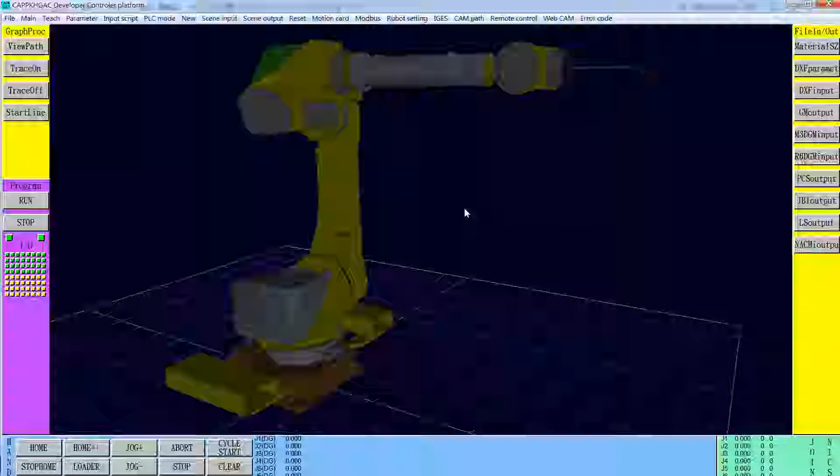Whenever we get the IGS file, we have to go into SolidWorks and open the old file to find the right folder, the FANUC 710, and translate the coming IGS file into SolidWorks inside geometry file. Open it.

The coming IGS file will translate through several processes until the 3D geometry model displayed on the screen, which is the assembly file of the Loba. Before doing anything, we have to survey.

If the Loba is located correctly. Let's see, this is x-axis, this is y-axis. So the Loba stands up, the sky at the top. So it is correct. And then we survey the original of the Loba. We put the cursor, press nothing. Then the center of the Loba, the original point of the Loba, will display at these points. This side cannot see correctly.

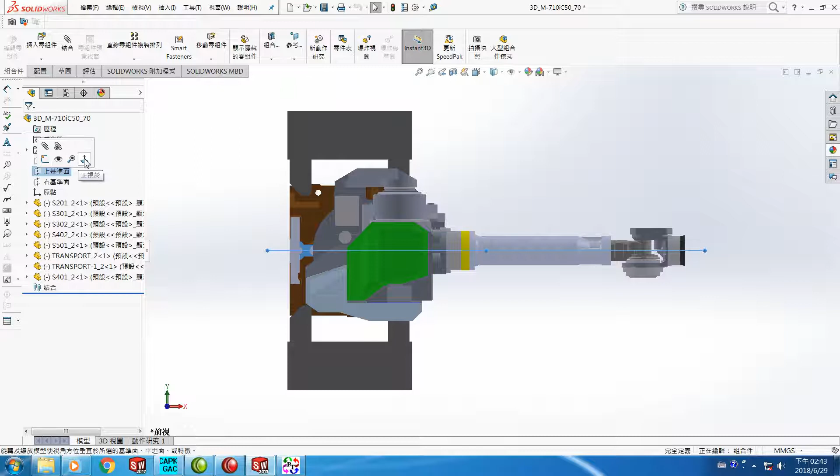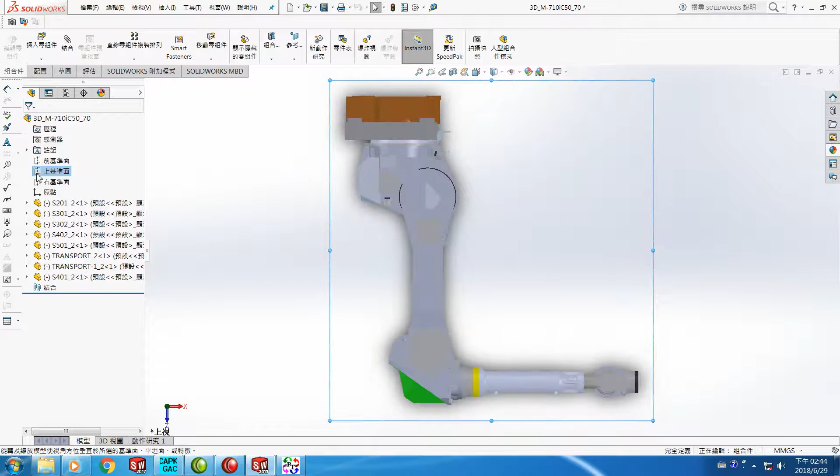Then we change to the up base position, and then see the original points at the bottom of the foundation. So this Loba is correct, standing up and in the right position.

And the home position is just like this. This is X positive. The Loba points to X positive. And the component 3, this joint and this joint, the X coordinate should be the same. That means this bar should be vertical.

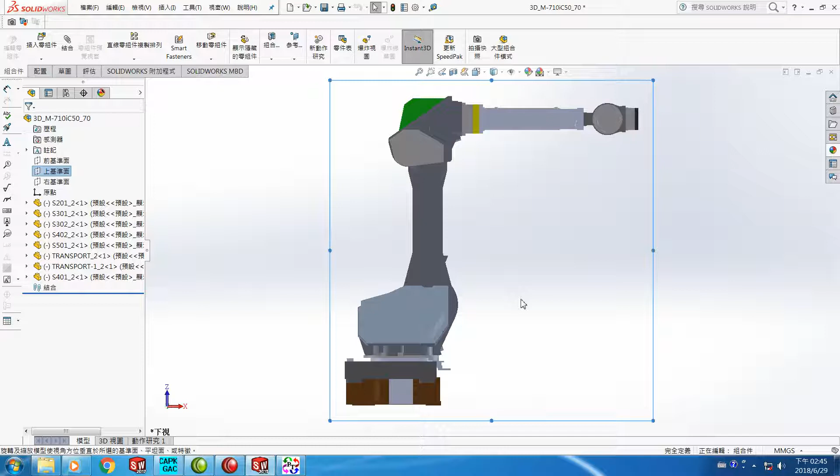This is a very foundational, very standard 6X Loba. The 6X Loba definition: the first axis always rotates around the z positive direction. The second joint rotates around the y-axis coordinate. The third joint rotates around y positive as well.

The fourth joint rotates around the x positive direction. The fifth rotates around y positive as well. The sixth rotates around the x axis. This sixth basic rotating direction is standard definition.

After the transformation from IGS into the geometry displayed on the screen, we have to save the assembly first by means of a save file. Give the style as ASM, the name the same as before the IGS file, and save it.

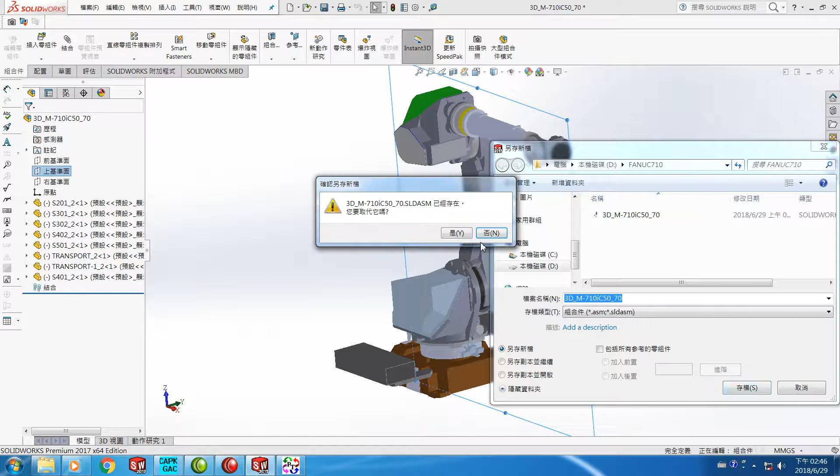After saving, we survey if the X-Y-Z coordinate is correctly located. Then we have to survey the separation for each J1 to J6 component before doing any combination.

Suppose for the base starting from the foundation, the foundation, you pick here, it will reflect here. And then we press here, it will reflect the total geometry on the screen. You can see this one and this one. This one is transport 1, this one is transport 2.

Because this is a really big Loba, these 2 steps are better for the workers to stand on. Therefore, the basement, not only this component, the transport 1 and the transport 2 have to join the foundation, because these two are fixed on the basement to form a total foundation.

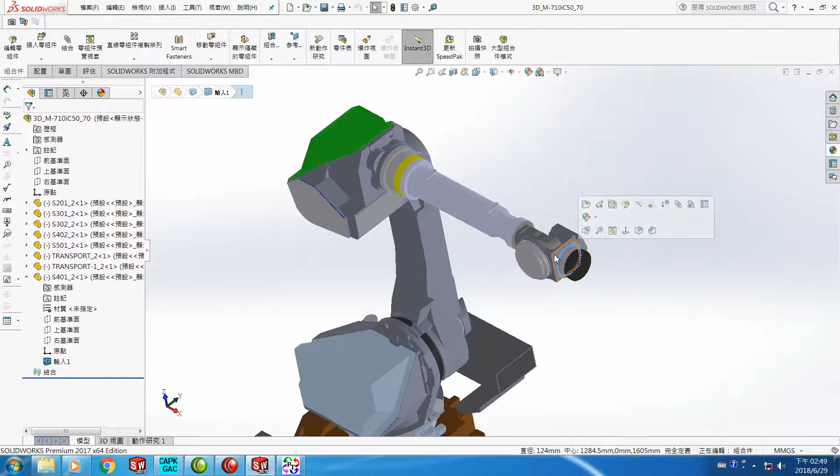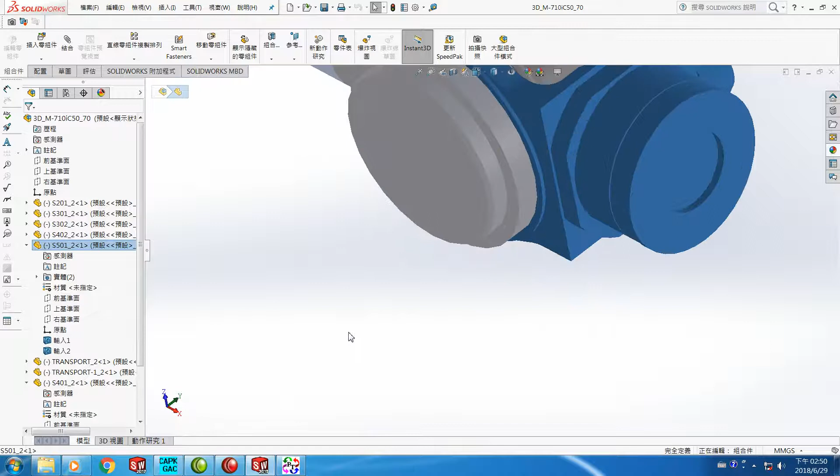And how about the J5? Okay, J5 and J6 are combined together. We separate it first, then handle J5, then J6 separately, to get 6 components plus the basement, totally 7 components. Then to add a tool, we have to get a PRT file for these 7 components, and then get an IGS file of these 7 components.

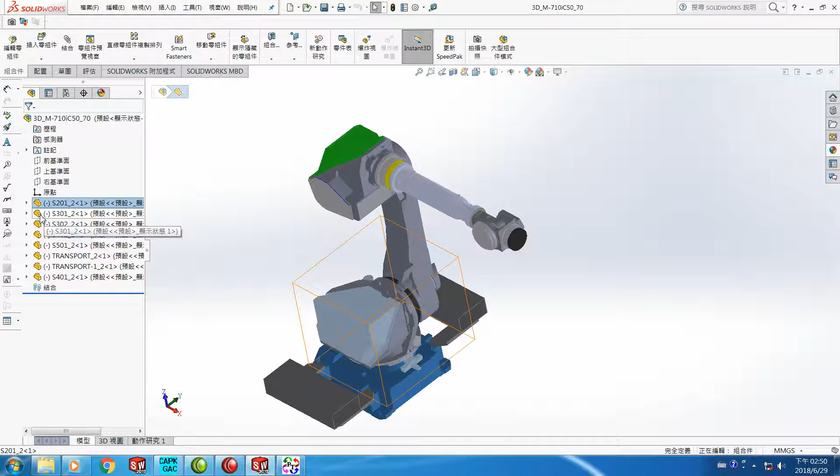Okay, we saved the assembly file already. Now continue to separate, starting from the basement. Okay, we surveyed already the basement, including the first one and these 2 transports. So we delete this one until here, including the last one. Leave these 3 on the screen.

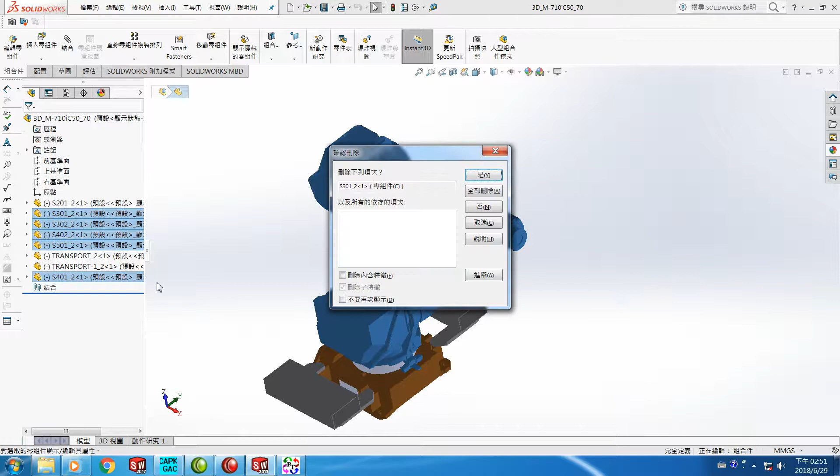After highlighting, how to remove it? Simply by pressing the delete key on the keyboard and select the second, delete all.

When we're doing the color change, for the parts without colors, we change the color. How to change it? Simply by putting the cursor on top of it and press the right button, choose the outlook, pick the white circle, and the color shading area will appear at the right side. Then we can press any position to choose the color.

If we want to give the standard yellow color, we have to change R pixel to 255, G to 255, the blue color pixel to 0. Use RGB representation. Then we make sure the color is okay, and then change this color.

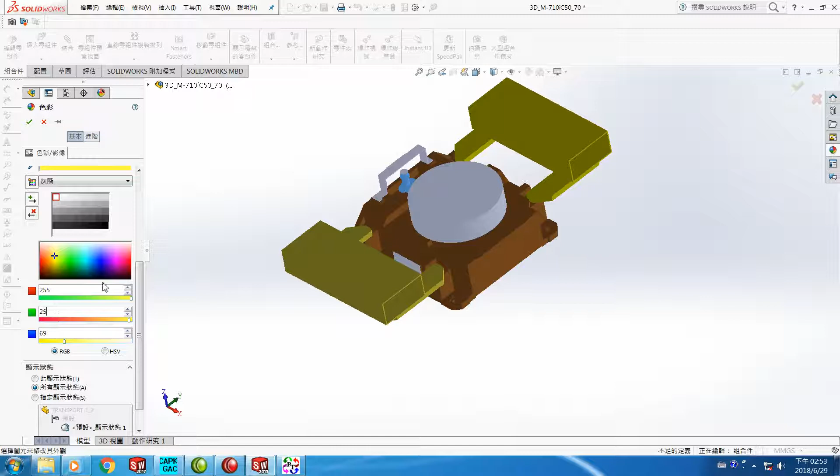Use right button to pick this component, pick outlook, pick the white ball, and pick the yellow at any place area, and correct R pixel to 255, G pixel to 255, and blue pixel to 0, and make sure. Okay, after these 2 components' color changed to yellow, then we finished the definition of foundation.

Then we save the PRT file and IGS file as well. How to do it? Simply by pressing to choose save another file, another new file. First the style, choose .prt.

The file name we give FANUC. We use the short name FN to represent FANUC. According to the naming specification, we use FN0 as foundation. Foundation means this one is fixed on the ground, will not move. Then we save FN0.prt.

After that, we use save another new file to save the .igs file. So the style has to be changed into IGES and give the file name FN0. Then we save FN0.igs.

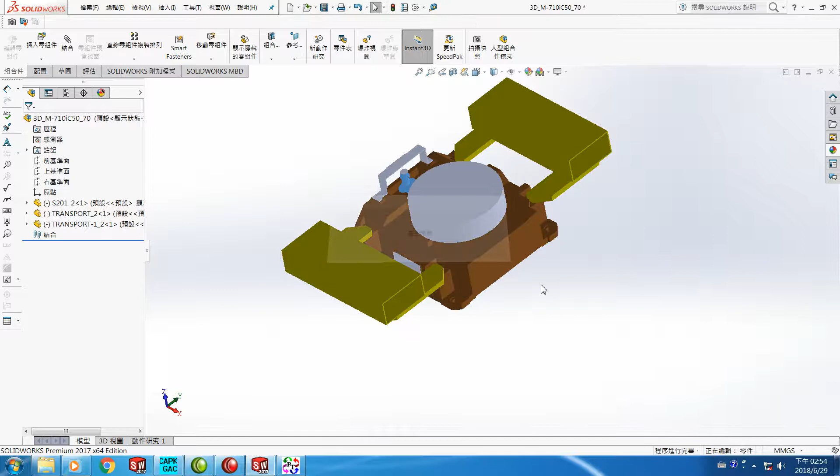So after foundation is finished, then we can do the same way to handle J1. The same, remove the component to leave J1 on the screen, and then save J1 as FN1.prt, and then save another new file - the style, choose IGS, and the file name FN1, and then save it. Then we can get FN1.

The main purpose is to get the PRT file and the IGS file of each component. For FN2, we can get FN2.prt as well as FN2.IGS. The same, we can get FN3.prt as well as FN3.IGS. We can get FN4.IGS and FN4.prt as well.

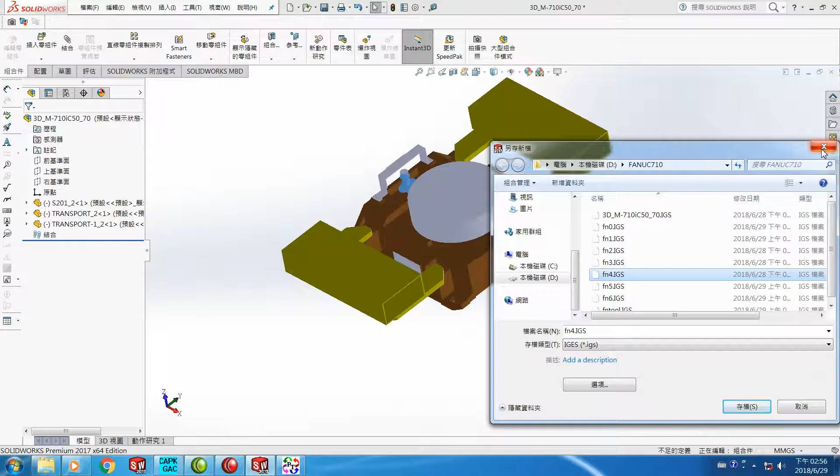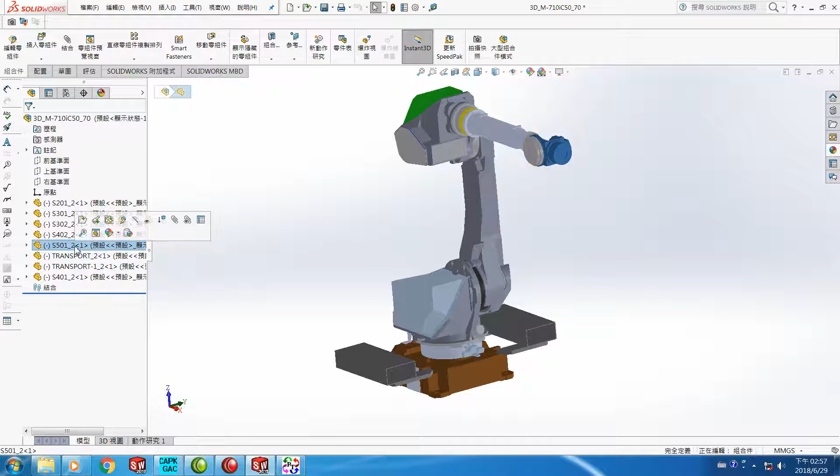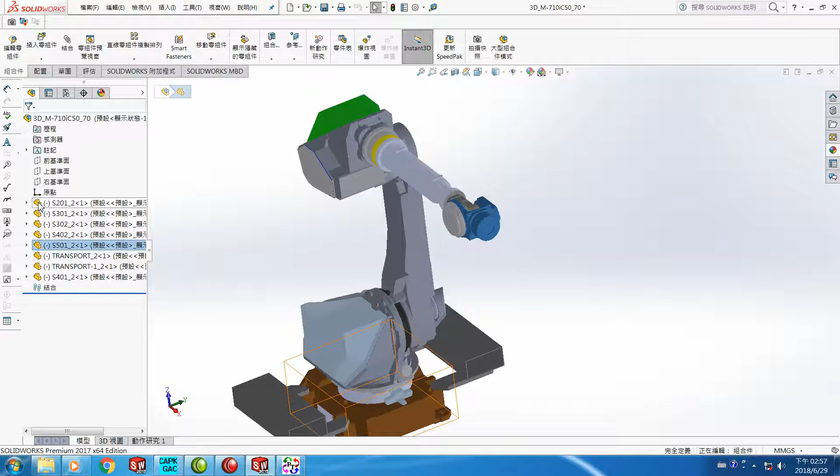So right now we are talking about separating the parts. These parts, pick it and press selecting here. You can see the total geometry highlighted here. So we remove the rest, leave this one on the screen. How to do it? Put the mouse on it first and press the left key of the button, and move the cursor to it first, and press the left button of the mouse together with the shift key of the keyboard.

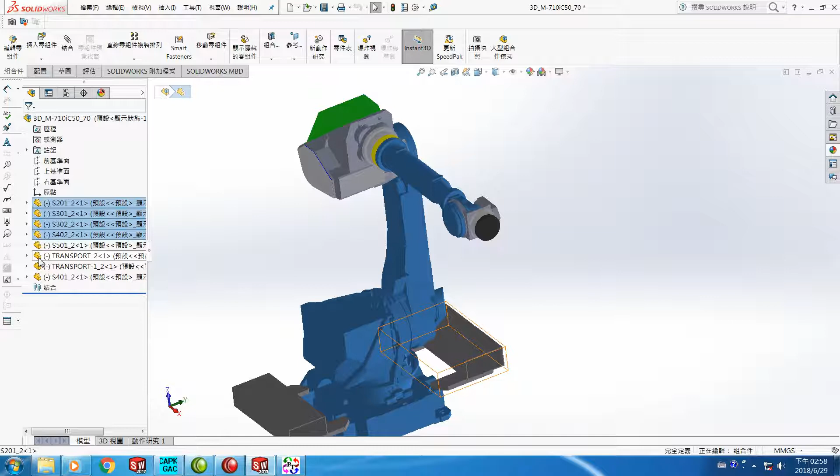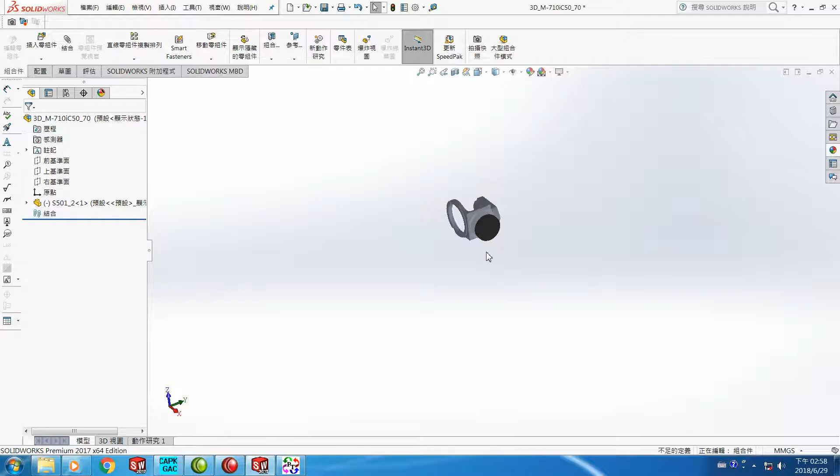The rest three, pick one by one by pressing the control key of the keyboard together with pushing the left button of the mouse. Pick one by one. Okay, we left this component on the screen. How to remove the highlighted parts? Simply by pressing the delete key of the keyboard and select the second, delete all of them to leave this component, the single component, on the screen.

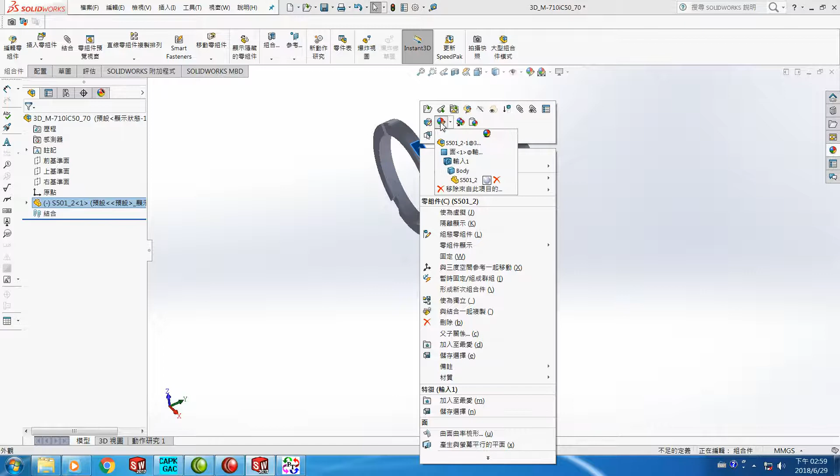Before we do anything, we change the color first by pressing the right button of the mouse and choose Outlook, and choose the white ball, and pick the yellow parts, and give the R pixel as 255, green pixel as 255, the blue pixel as 0. Make sure. Okay.

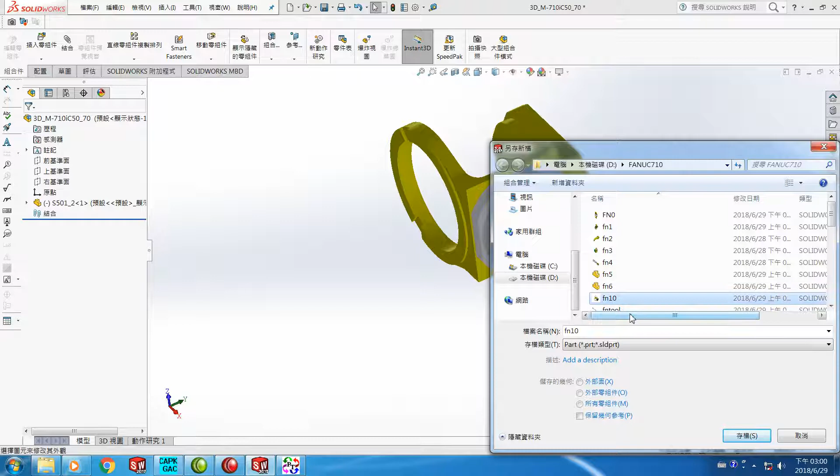Then save this component first before separating. Okay, how to save it? Simply choose file, save another file, give this the type .prt. Okay, we want to separate the J5 and the J6. We give a file name outside J1, J0 until J6. Right now, for example, we give the name of this component FN10.prt, save it temporarily.

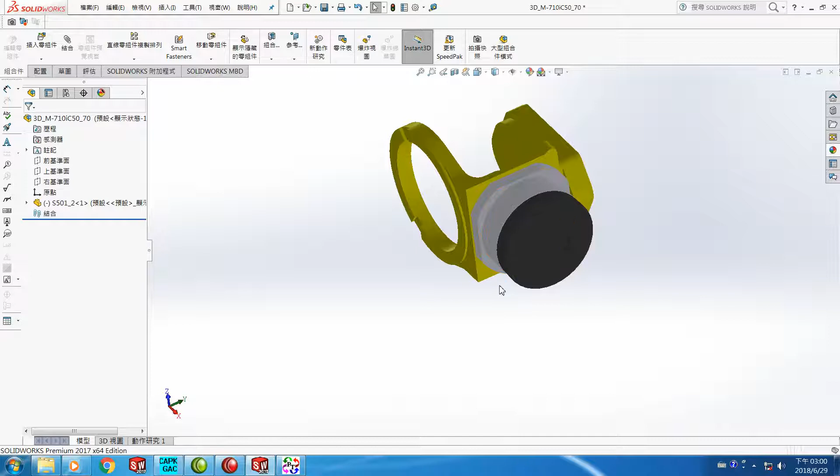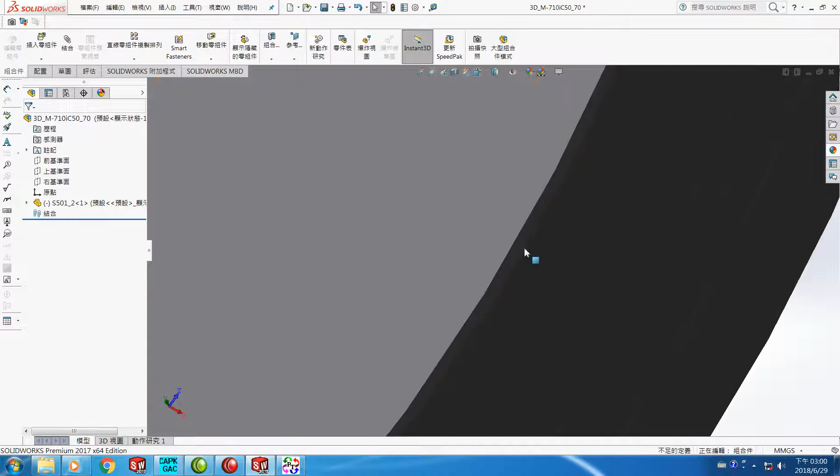Okay, right now commencing to separate each part. The J6 is the dark parts, the rest is J5. So we get the boundary between J5 and J6. The boundary is here, we enlarge it. If there is any gap, even a really small gap, we can pull the wheel toward our body to enlarge the gap. You see, larger and larger, until we can put the cursor on top of it, and then press the left button of the mouse.

And then we choose a normal to this surface. It will display a normal of the selected surface. So we can create a square surface on top of that selecting surface.

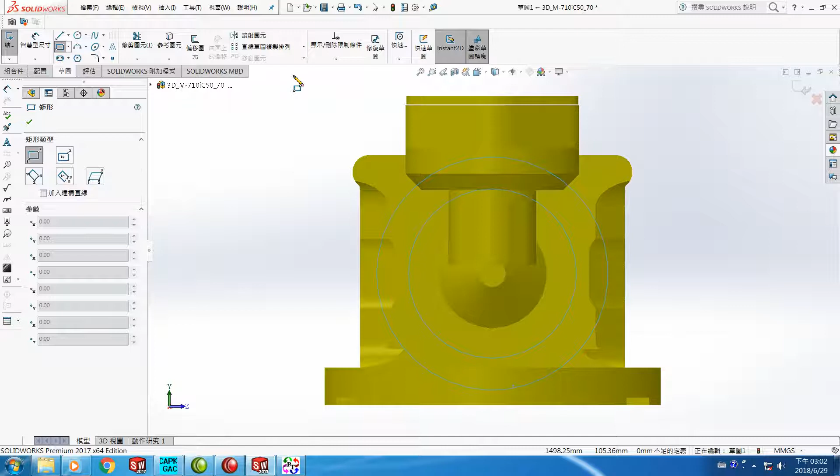How to do that? We can choose the sketch function. Sketch. Then at sketch 1, open here. Then we can pick the square, the two-corner square. How to round it? Choose the function first. Move the cursor to the left top corner and press the left button of the mouse, and continue pressing the left button of the mouse, and pull the mouse down to the right bottom corner.

Cover every joint on the screen, and then release the left button of the mouse. A surface will be created along the boundary between J5 and J6. So the boundary is created, boundary square surface created. We close the definition.

And then how to remove the left part or remove the right part to get J6 or J5. We simply choose the assembly function and see which one. Here, to enlarge the function, two functions appeared on the screen. One is to translate to remove material. Another is rotating to remove the material.

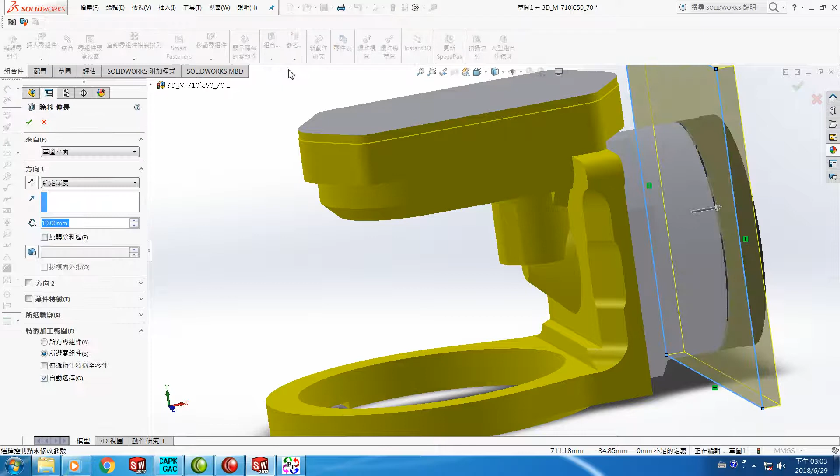So it's translation, we use the translation to remove the material function. After choosing it, you can see the system will automatically generate 10 millimeters thickness along the arrow direction.

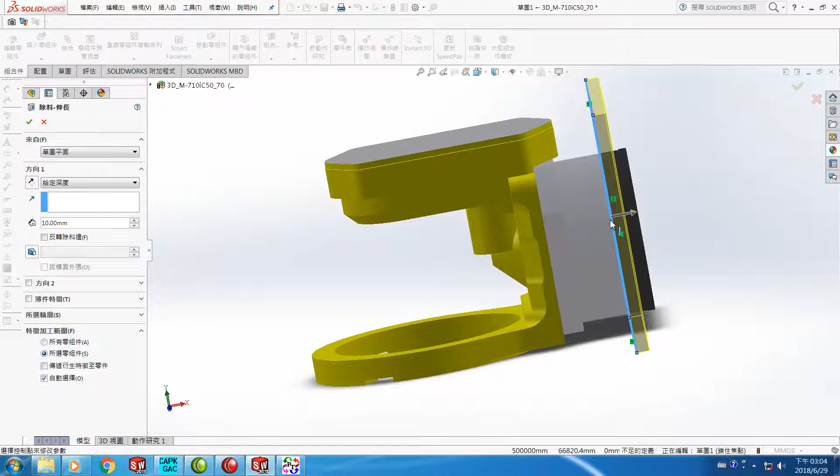This 10 millimeters still doesn't cover the whole J6 component. So we enlarge it from 10, suppose to 30 millimeters. Press enter. Then you can see on the drawing this surface, the square surface created is 10 to 30 to generate this surface cover the J6.

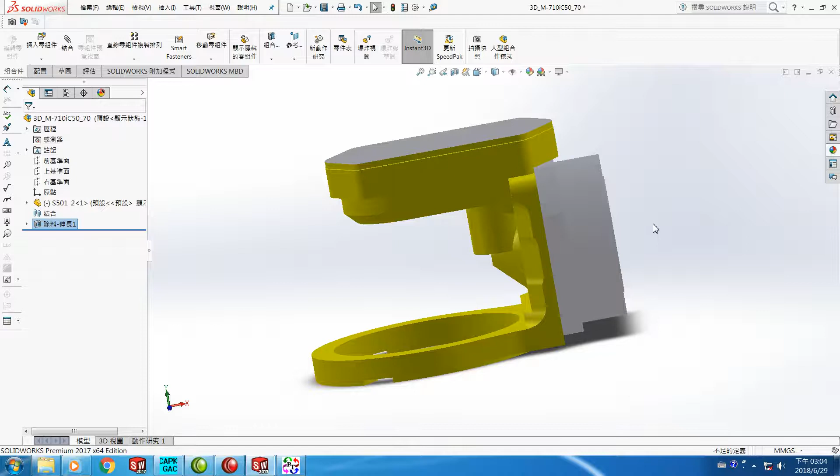If we remove these parts, then we can get J5 altogether. So we just say sure. The system will automatically remove the J6 for us and get J5 on screen. We press any left button to put the cursor anywhere to remove the highlight.

Then we can save the J5 component. Save what? Save .prt and save IGES. Then we commence to do that. Save another new file function. The type choose .prt.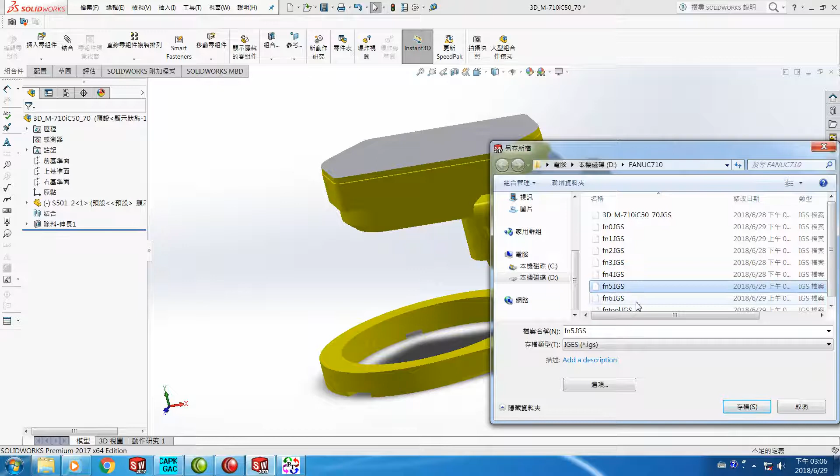The file folder FANUC 710. This is component 5. Give the name fn5 and save it. Save fn5.prt first, and then commence saving the .iges. How to do it? Choose file and save another new file function, and give the style IGES, and give the file name fn5 to save fn5.iges. Save it.

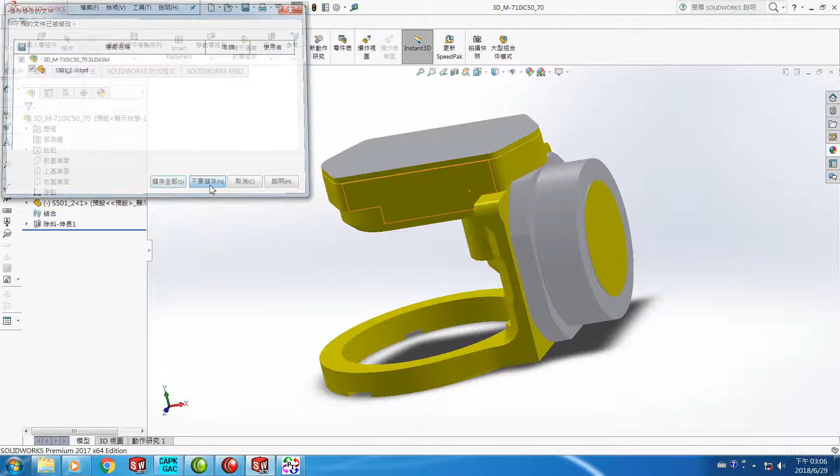Okay, so after the file saved, then we have to get the single component 6. So we go back to FN10. We have to clean the screen first. No saving. And then choose the component FN10, which will display on the screen.

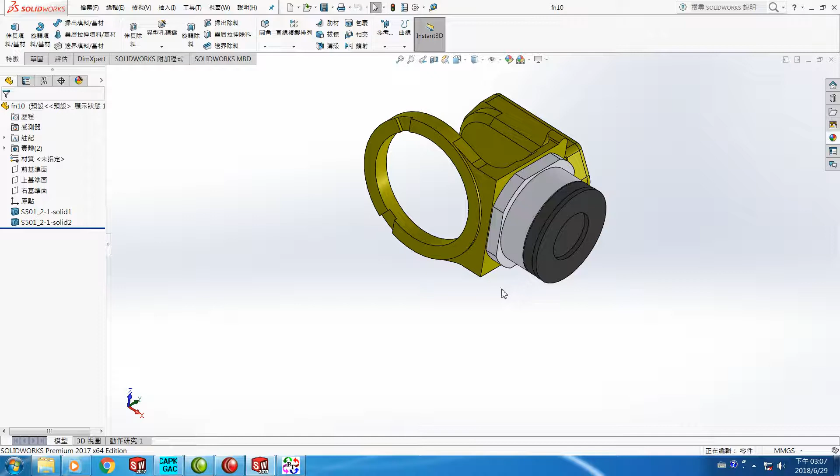Then how to separate the J6? The same. We found the boundary between J5 and J6. Enlarge the gap until big enough that the cursor can pull inside the gap, and press the left button and choose normal to this surface.

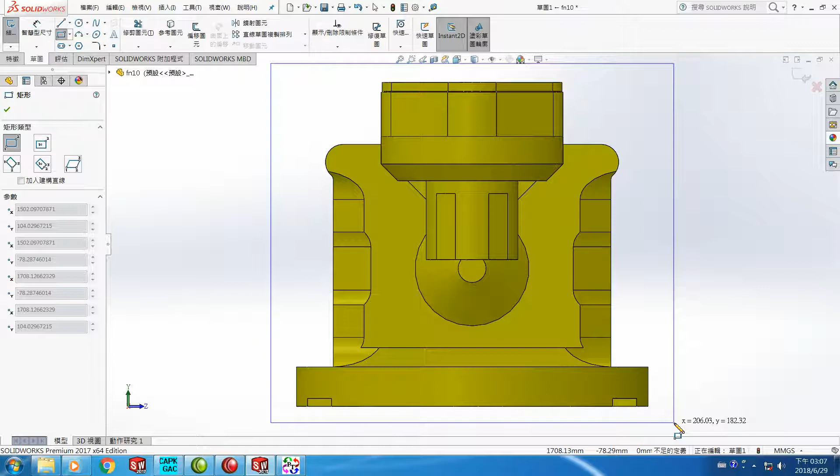And then the same, we can open the sketch. Sketch 1 will appear on the screen, and choose the square function, two-corner square function, and press the left button of the mouse. Keep pressing and pull the mouse toward the right, including the whole geometry on the screen, and release the left button of the mouse to create a square surface on the boundary. And sure.

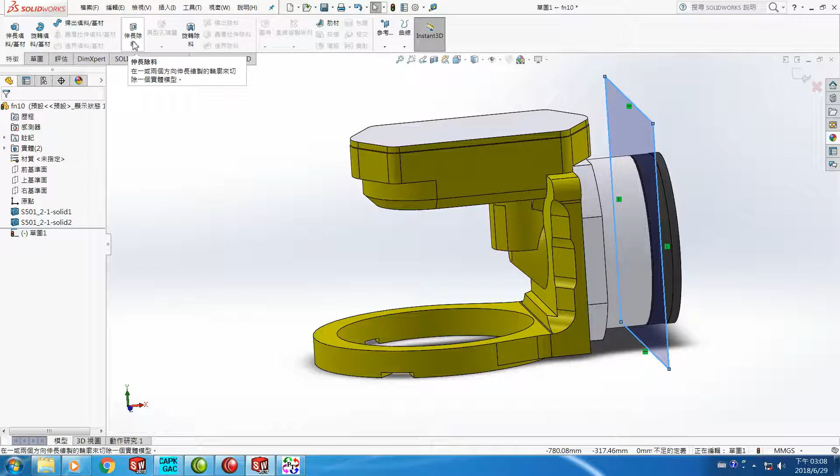Okay, then we have to remove the left part and leave the right part as our 6th component. How to do that? We choose this function and choose extend the surface, and the remove material function. The same, it will automatically point to the right and give 10 millimeters for example.

So this is direction 1. We have direction 2 as well. Direction 2 is this direction, but it opens direction 2. Direction 1 cannot be closed. So we simply use direction 1 to change the direction from pointing to the right to the opposite direction, pointing to the left. How to do it?

We can change this function. Right now, the original definition is to give the depth. We can simply choose to a point and pick a point. You put the cursor on one point, highlight the point, orange point, and a big circle, big point will appear on the screen.

Then we say okay, extend this area, this surface until this point first. The purpose is to change the arrow position to point to the right, change to point to the left. Okay, press down and you can see the removing area grow bigger until this point, and the arrow changes from the right to the left.

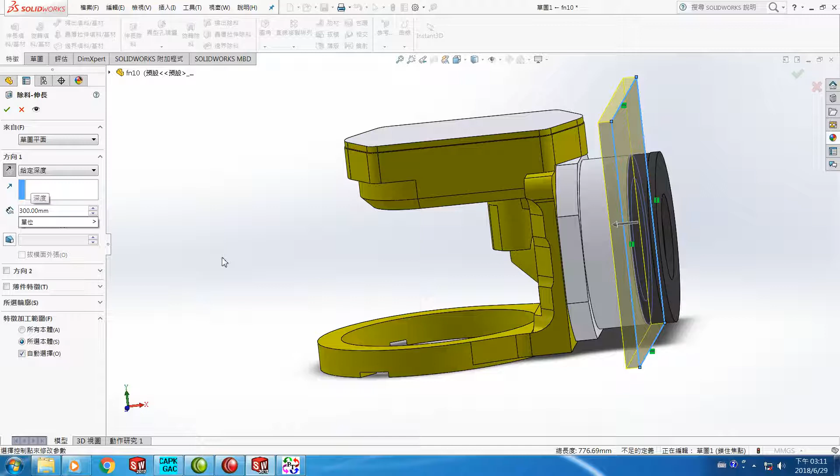Be the original defined 10 millimeters. Then we give a big distance, suppose 300 millimeters. Press enter to see if it covered the whole J5 area or not. This is covered, so we choose the correct depth. If we remove these parts, then we can leave the dark parts J6 on the screen.

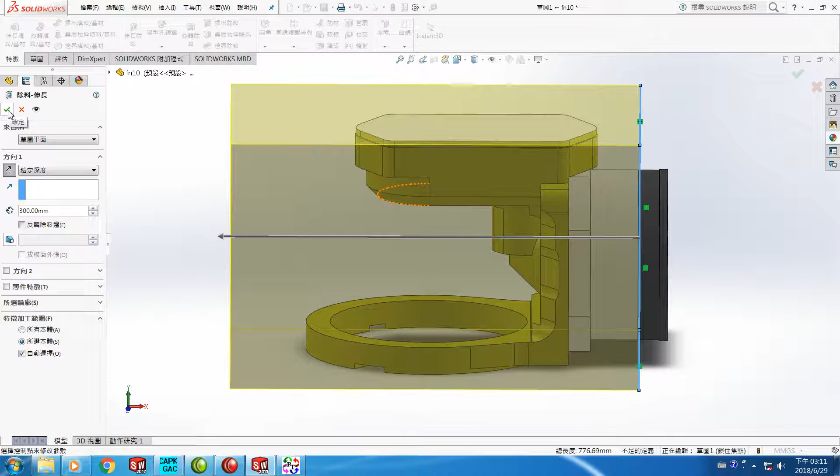So okay, press this button. The system will remove the J5 automatically for us and leave J6 on screen.

So after this, we can save PRT as well as IGS file. Choose file and save another new file, and the style is .prt, and the file name give FN6. So we save FN6.prt.

Okay, then we save IGS file. The same, choose save another new file. The style, choose IGS.IGS. The file name FN6, the same, and save it. Then FN6.IGS will be saved.

And right now he say yes, you choose the body, the chosen body, because we highlight here. Okay, we just remove it first and pick nothing. How to remove the highlight? Just simply put the cursor anywhere on the vacant position and press the left button. Choose nothing, then the highlight parts will be removed.

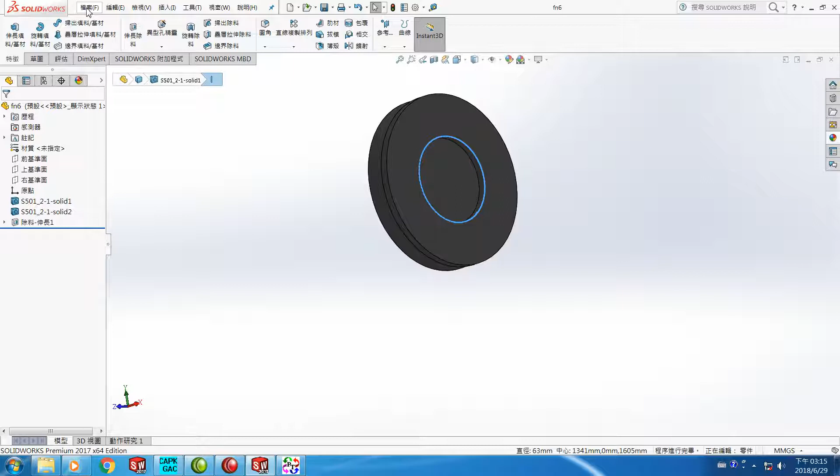Okay, right now we need to use assembly picture, not this one. So we close it, simply by close the old file to clean the screen, and then choose a vacuum assembly file, close it, and sure, so nothing assembly on the screen.

And then use insert component. Insert which one? Insert last one, FN6, and open it at its original location. And to see its location is correct or not, put a cursor on the edge, highlight, and press the left key of the button. 1341 0 Z equal to 1605. So this is correct.

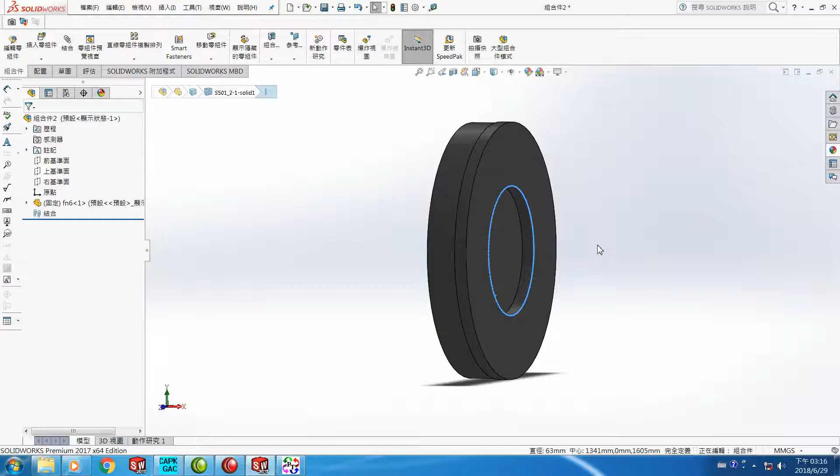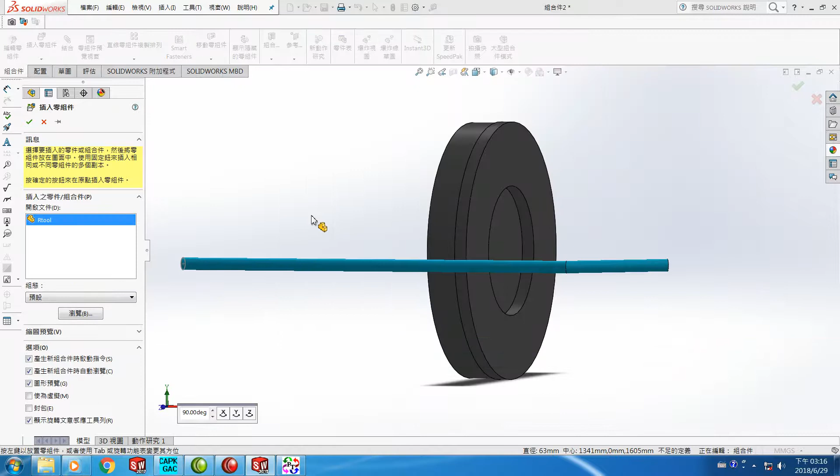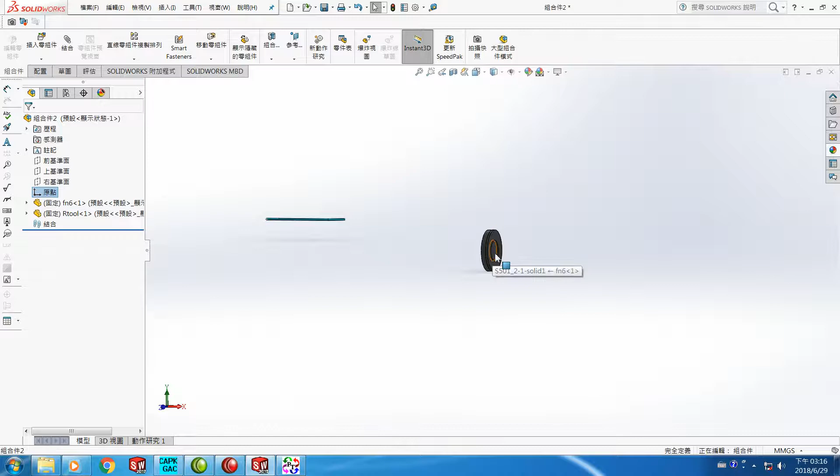And what is the original position? The position locate the tool original defined, locate on the center, on the original point of a Cartesian coordinate. Then we have to later this point to combine with the original points of TCP points. How to locate this one to the right position?

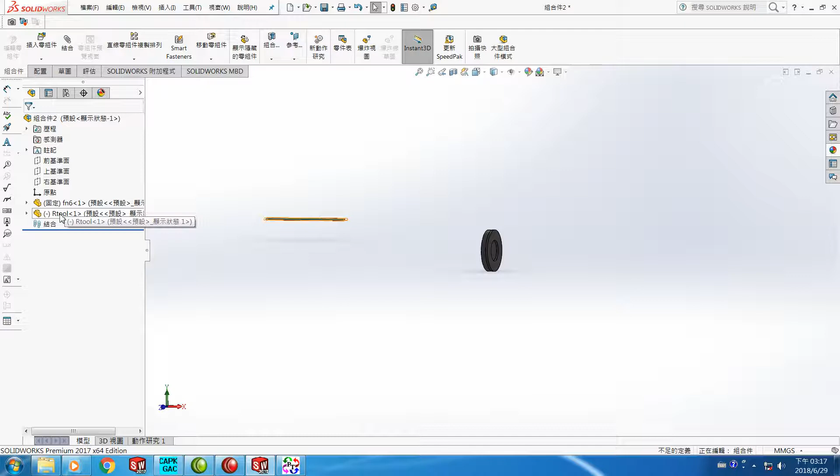We have to remove the mark in front of our tool. How to do it? Simply by press the left button of the mouse and choose floating to remove the fixed, and then choose it to highlight the component and use move the component function.

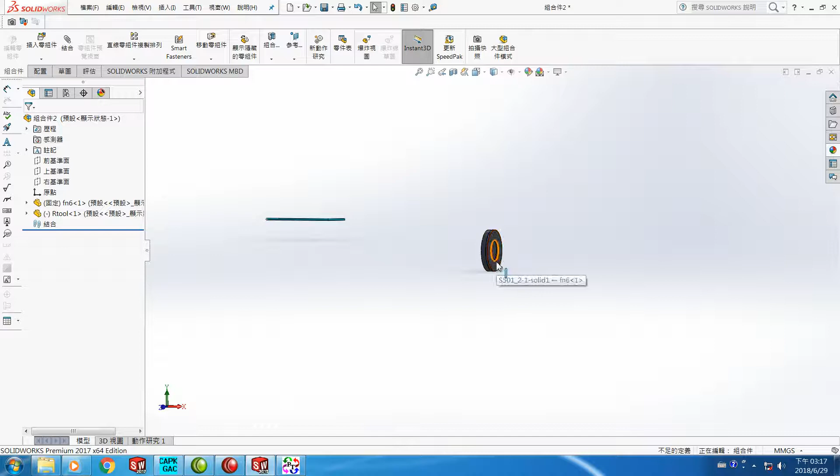And choose from Delta XYZ to give the correct XYZ value to let this point move to this position. If we forget, simply go out and find the position first, then press OK. Remember 1341, 1605.

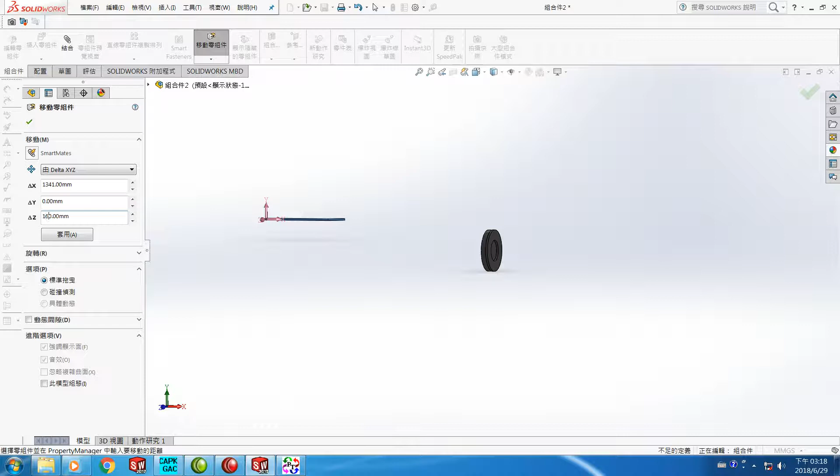Simply select, simply choose move the component, and from Delta XYZ, and give X 1341 and Y remains 0 and Z 1605, and OK. Then the tool will move to the right position. Then the new TCP point will, according to our CMS setup, change to this, the center of this point, to the tip of the tool.

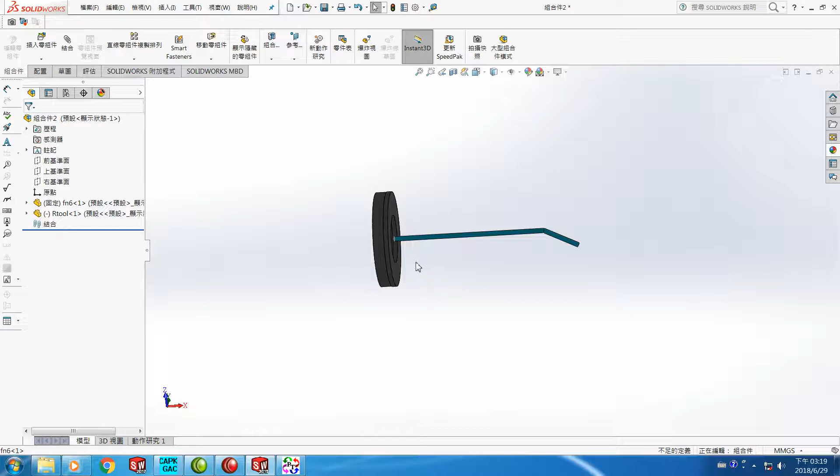Then OK, we have to save PRT file and IGS file of the tool. Then we remove the fn6 first, choose it and press the delete key and choose yes to leave the tool only on the screen.

Then we can save another file, .prt style, then give the file name as FN tool. The folder, you have to choose the correct folder, the DFN FANUC 710, open it, D FANUC 710, and give the file name FN tool. Okay, we save fn tool.prt first.

Then, how to save an IGS file? We remove the screen first, no saving, and then open a new assembly file. Close it. Okay, then the vacuum assembly file opened. Then use the insert component function to insert the fn tool at its original position, meaning this one is the TCP original, to get the TCP point here.

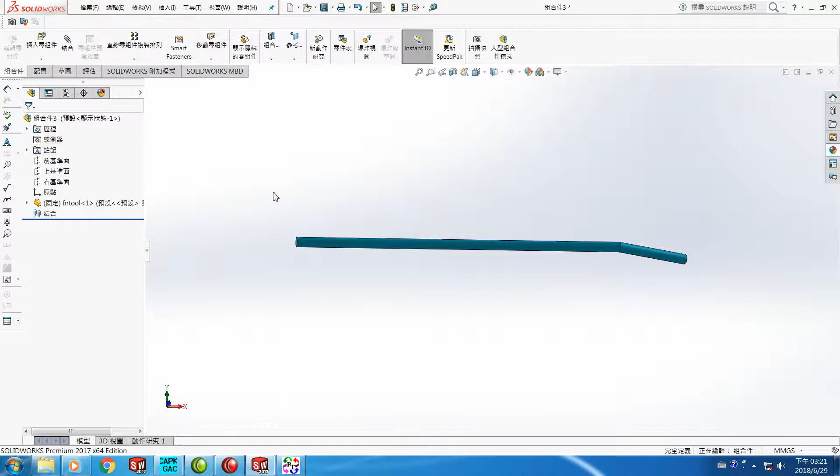So after this, only the tool is on the screen, then we can save the tool's IGS file. How to do it? Choose the file, choose save as a new file, and give it a style as IGES.IGS, and the file name, give fn tool, and then we can save fn tool.IGS.

Okay, after this, from fn0 to fn6 including the tool, fn tool, totally 8 component IGS saved. Then we can translate this IGS file, 8 IGS components, by means of Polytrans, change its style into an X file to prepare the X file before filling the CSV table of the scene of FANUC 710.

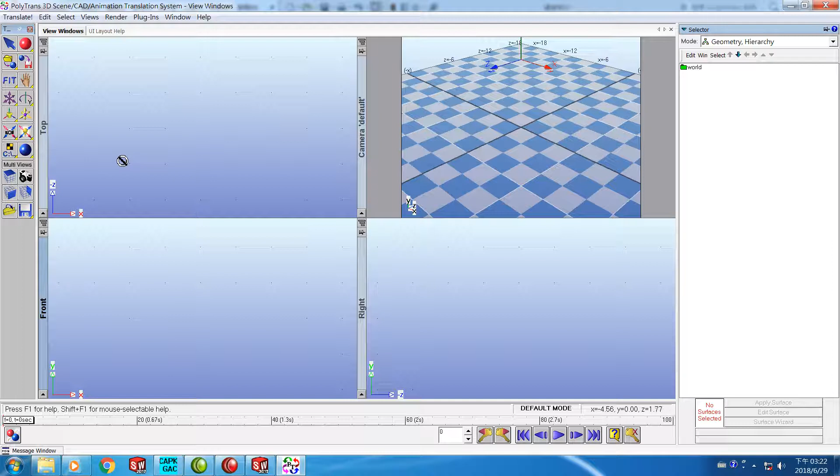When we leave SolidWorks and go into Polytrans, we started the translation from the foundation. Use translate function, choose input 3D geometry, the style is the IGS. Choose this function v5.3 via Okino ASCII file, and the folder choose D FANUC 710. D FANUC 710. The foundation is fn0 IGS, and open it.

Okay, yes. Start scene optimizer. Start. Yes, okay, the foundation appeared on the screen. Everything is correct. Then we save the positive part of this component and then save the negative part of the component.

How to save it? Translate, export 3D geometry, DirectX file style. Now save the positive first. These 2 items not picked. Okay, the file folder is correct.

Then for the positive, we name it fn0. fn0 is the foundation, A means positive parts. We save fn0a.x first, and then save the negative parts by means of translate, export 3D geometry, DirectX file style.

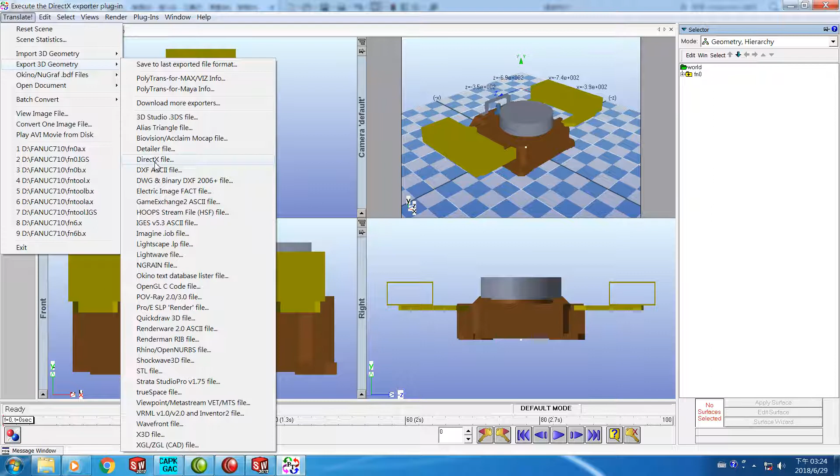For the negative parts, we have to pick reverse orientation of all polygons and the normals, and pick flip polygon normals, to let the normal direction go to the opposite direction. So the positive and the negative for each surface, for each triangle surface, we combine the positive and negative as the whole component. Then we can reflect the lights from any direction. Thereafter, the component could be seen clearly.

Okay, the negative parts we give fn0b.x and save it. So how to combine the positive and the negative? First of all, we have to use this reset scene to clean the screen, and then use import 3D geometry, DirectX file, to import the positive of foundation from FANUC 710.

The positive of foundation is fn0a.x, and open it. Okay, yes, so fn0a is on the screen. Then we import 3D geometry DirectX file to import the negative parts X file from the folder FANUC 710. The negative name is fn0b.x, and open the file. Okay, yes. Then fn0a and fn0b altogether appeared on the screen.

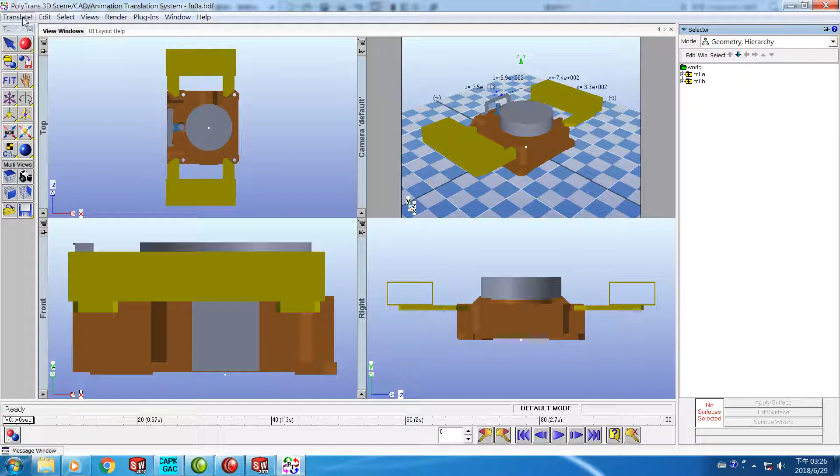Then we save the combination of positive and negative component by select export 3D geometry direct X file and give the positive direction only. Okay, and the file name, remove the B, only fn0. Press enter. Then we can save fn0.x. The rest are all the same.

The procedure is all the same. Then we can get fn1.x. We can get fn2.x, fn3.x, fn4.x, fn5.x, fn6.x, and the last two, fn tool.x. Totally 8 X files created inside the FANUC 710.

Then we can copy these X files, that is fn tool.x, fn6.x until fn0.x, and copy these X files into our CMS CAPP data area, that is CMS GAC data file folder position. After these X files go into the CMS CAPP data area, then we can copy an Excel CSV file and change the name to the right name we want, and use edit function to change all the data to the right data and check the results, to see if the CSV file is correct or not.

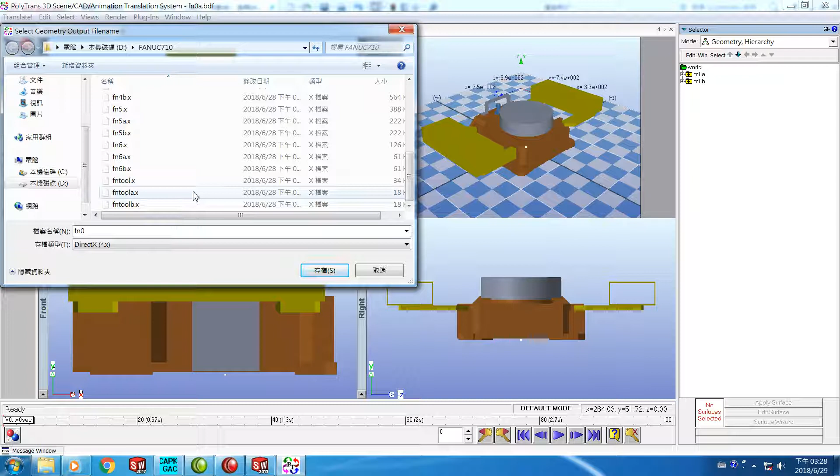So we commence to do that into the CMS GAC data, and we prepared already, so we choose fn start CSV. We just simply survey if everything inside is correct or not. So we give name fn meaning FANUC 710, new meaning new rule to define the limitation, and the RGB arrow for the TCP points. So we simply open it by pressing the left button twice.

Okay, we check fn0, the base.x, give mesh 0, object 0, attached to itself 0. fn1, the j1.x, give mesh 1, object 1, attached to object 0. The j2, fn2.x, give mesh 2, object name 2, object 2 attached to object 1. j3, fn3.x, give mesh 3, object name 3, object 3 attached to object 2. fn4.x give mesh 4, object 4, object 4 attached to object 3. fn5.x give mesh 5, object name object 5, object 5 attached to object 4. The last one, fn6.x give mesh name 6, object name 6, object 6 attached to object 5. The tool, fntool.x give mesh name 7, object name 7, object 7 attached to object 6.

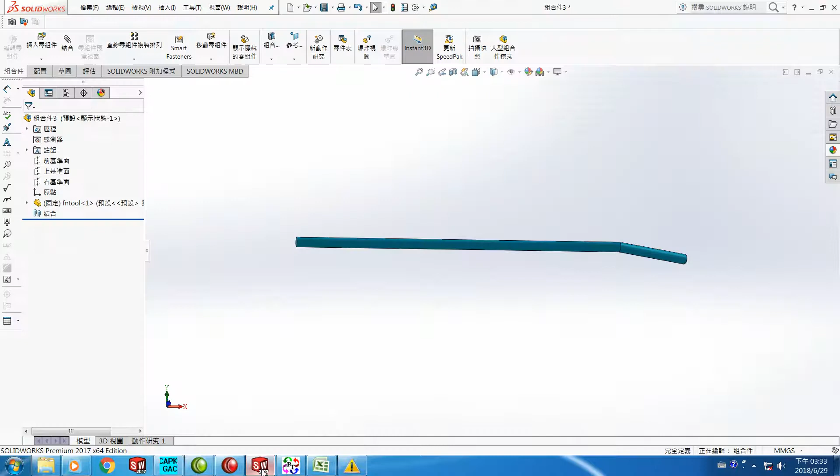Okay, we continue starting from the first axis. The first axis drives J1, fn1. We talked already, rotating around the positive z direction. N1 0, N2 0, N3 1 is a rotating axis. So we say rotating around the z-axis, we leave z pivot to any value, but we have to make sure x pivot and y pivot is 0, 0. How to make sure? We go back to SolidWorks to insert the foundation fn0.

At its original position, we see the rotating center from the edge of the circle, putting the mouse on the edge of the circle. A highlight orange circle display appeared on the screen. We simply press the left button of the mouse, then the center 0, 0, 266 appeared at this position.

We know rotating around the z-axis, we don't worry about the z pivot. Simply we make sure x, y is 0, 0. Let's go back to Excel. X pivot 0, y pivot 0. So the first axis is correctly defined.

Then we go to the second driven axis. It is rotation axis J2, rotating around y-axis. So N1 0, N2 1, N3 0 — 0 1 0, rotating around y positive direction. Then rotating around y, we don't worry about the y pivot, leave the value to be anything. We have to make sure X pivot 150 and Z pivot 565 is correct.

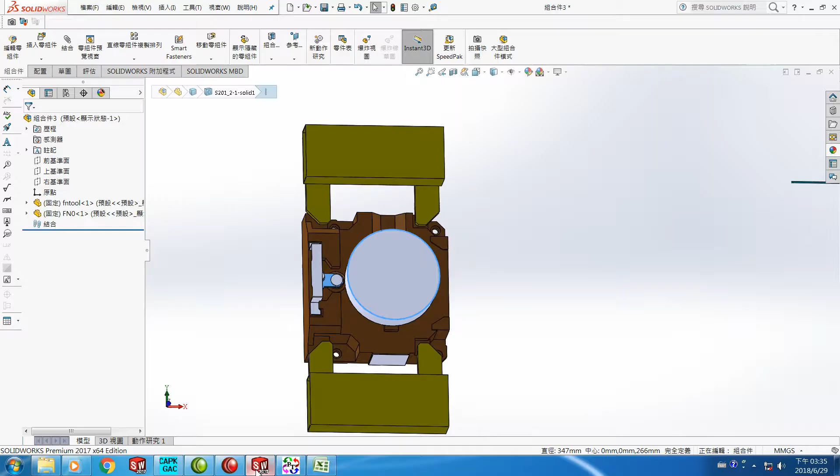Then we go back to SolidWorks to insert the one on top of the basement, FN1 component, and leave it in its original position. It is rotating from the circle. We can see the center, and to make sure X and Z is correct as our CSV table, we press the left button to get the center down here. So 150, 565, 150, 565. So the second axis is correct.

Then we go to the third axis. It is rotation component FN3 driven by the third axis of the motion control, rotating around the y-axis, y positive direction. So N1 0, N2 1, N3 0. So we leave the y pivot value to be anything. We have to make sure X pivot 150 and Z pivot 1435 is correct.

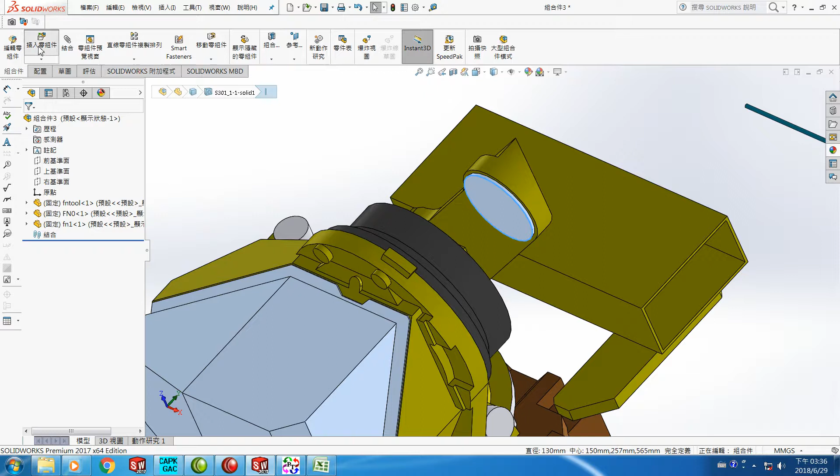Then we go back to SolidWorks to insert FN2 at its original position. From the circle here, we can see 150, 1535... 150, 1435, 1435. So it is correct, the third axis.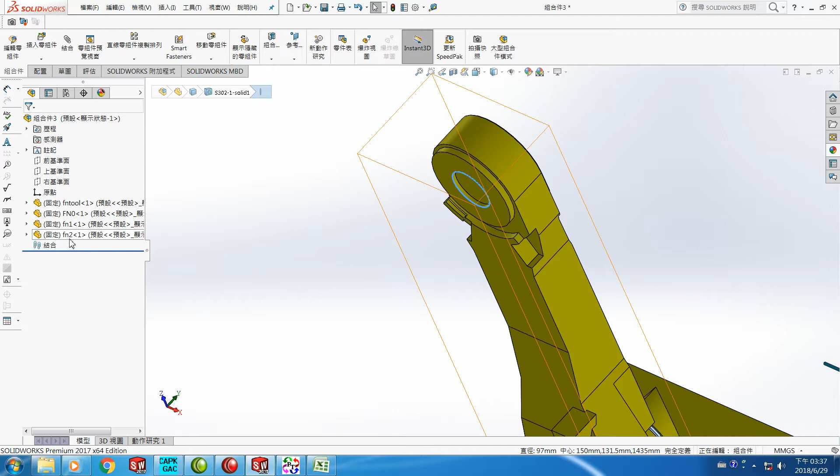So the first axis of the motion card parameter defines correct. Continue to the fifth axis of the motion card, which is translate-rotate, a two rotating axis, rotating around the y-axis. So N1 0, N2 1, N3 0. We have to make sure X pivot 1166 and Z pivot 1605.

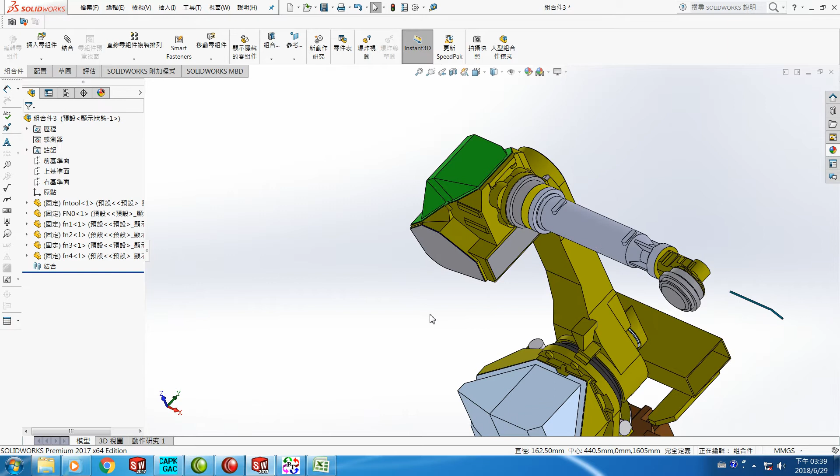So go back to the SolidWorks to insert FN5 on its original position. We can pick the center up on here, or simply open the next component. Okay, we do this one first to see the center, how much.

Press the left button. So we get 1166 1405, 1166 1605. So the fifth is correct.

So the last one, the sixth axis of the motion card, the component is FN6. It is a rotating axis as well. The last one we know, three of the pivot points is very important, although it's rotating around x-axis 100.

Before we say if rotating around the 100, the x pivot point cannot be anything, but simply because we have the tool to define it, we have to give an accurate x pivot point, otherwise we will change the RGB arrow position.

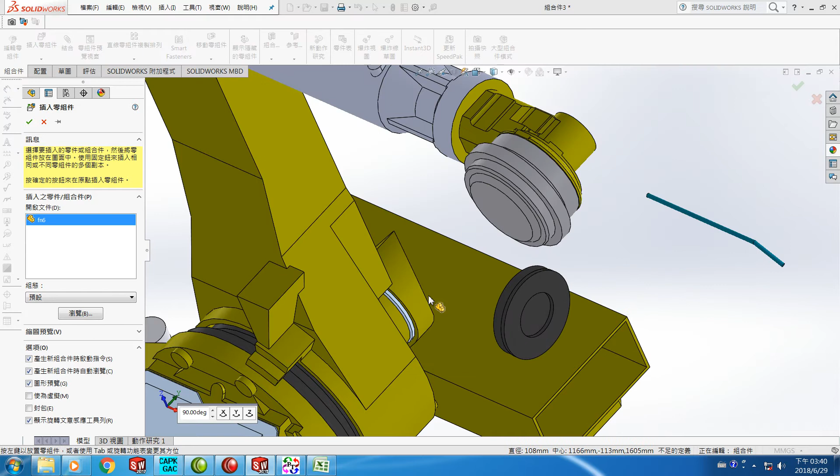Okay, let's go back to the SolidWorks to see if this value is correct or not. Then we open the last one, insert the component FN6, the last one, and appeared at its original position. Okay, and find the center of the original TCP points and press the left button while the highlight circle appeared.

On the screen, so the center 1341.0.1605 to see if the data is correct or not. 1341.0.1605. So the 6th axis is correct as well.

The tool, the same, has to mark translate-rotate 3, and the X pivot, Y pivot, Z pivot 243.3, Y pivot 0, Z pivot minus 25, rotating around Y 30 degrees. So the tool is correct.

The limitation translate-rotate for the first axis is 4. How do we get 4? It's 1 plus 3 to get 4. Write 4 here. So from 4, 5, 6, 7 until 9 to define this 6 axis limitation. The positive goes in this column, the negative of the rotation goes down here. We get this data from the DM of FANUC 710 to fill in this area.

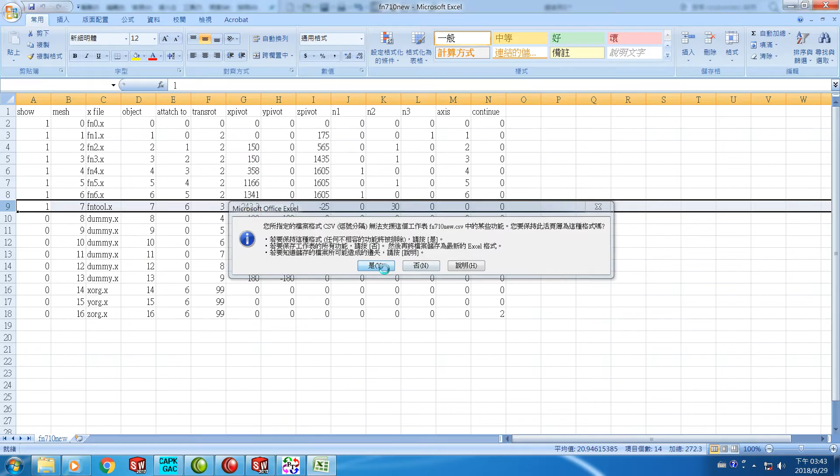Let me save it. Yes. Close it. Yes. And save the file name FN710 new and save it. Save. Yes. After saving, we can go back to our program to see if the CSV file is correct or not.

Simply use new to remove the geometry on the screen and use the scene input function to input the data from D CAPPKHGAC data file folder and find the previously defined CSV file FN710 new. Open this file, which will display on the screen like this. Then we can see if anything is missing. It seems all correct, so the file including the tool RGB is all correct.

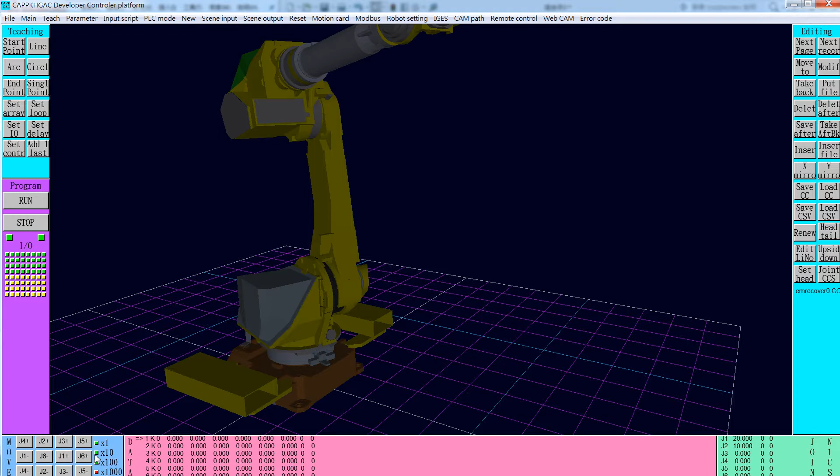Then we can survey the attachment, the parent and children relationship, whether it's correct or not, by choosing the teaching mode to check the joint mode first, starting from J1. The right hand rule: J1, the parent doesn't move, the children all follow. So J1 correct. J2, the parent doesn't move, the rest all follow correctly.

The J3, the J4, and the J5, and J6. So the joint mode all correct.

Then we check the Cartesian mode. How do we change into Cartesian mode? By putting the cursor on top of joint and pressing the left button of the mouse. Then the system will change the joint mode into the Cartesian coordinate system.

Then the x positive - what is x positive? X is the red arrow, Y is the green arrow, and Z is the blue arrow. So x positive means according to the direction of the arrow pointing, it will move the TCP point along that direction.

The system will use these points' Cartesian coordinates, translate back to see the TCP original position, simply because the tool has 6 transformations: XYZ, RX, RY, RZ rotation. So from these points, after the reverse process to get the TCP position, and then use the inverse process to get from J1 until J6 movements, then we display here the 3D simulation.

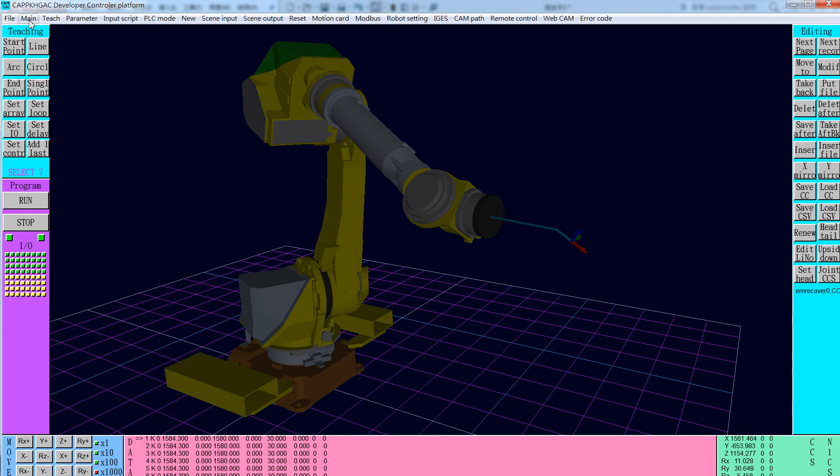We're doing the job the same as talked about previously. Okay, before the end of the demonstration, we use a practical CAM system to show how this robot works. Go back to the menu.

That means these points. So from these points to see the position of the material, it is with 1 minus symbol difference. So here write x minus 800. That means from here go x direction 800, and go positive y 200, and go up z 300 to get the center of the raw material.

Okay let's see. So this is the location of the raw material, and before DXF input, we have to make sure the DXF parameter is correct or not. The cutting speed set 100 millimeters per second, and the z-axis lift height remains 0 millimeters.

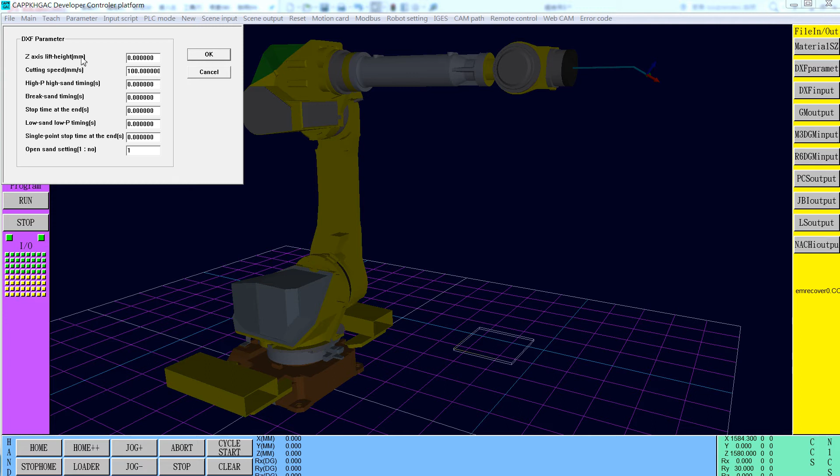Okay, then as in the Cartesian coordinate system, we choose DXF input, give a file name 'beauty', and open the file. The CMS CAPP system will automatically give

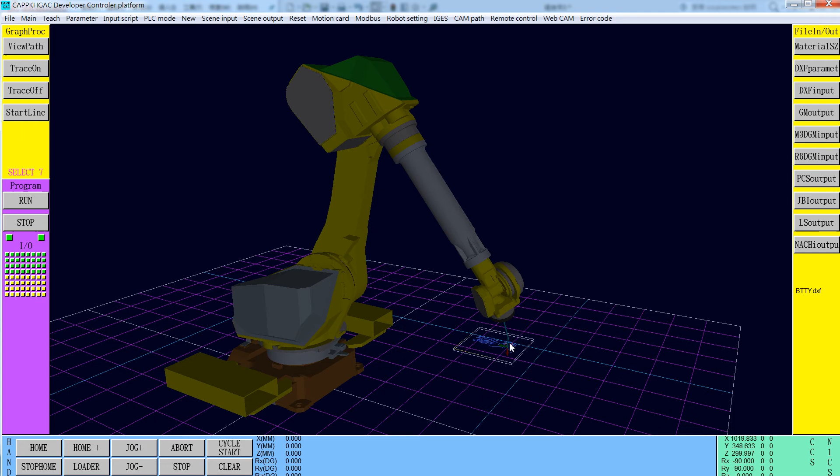the toolpath instructions in the data area. So it will draw the picture on top of the screen. So how many datas can we use - head and tail - we choose the tail. The total is 3086 to 3089 instructions of the toolpath of this beauty.

Then we can enlarge the drawing and use water jet or welding, CO2 welding, to go along the path to show the demonstration, and automatically end this demonstration after the toolpath reaches the end.